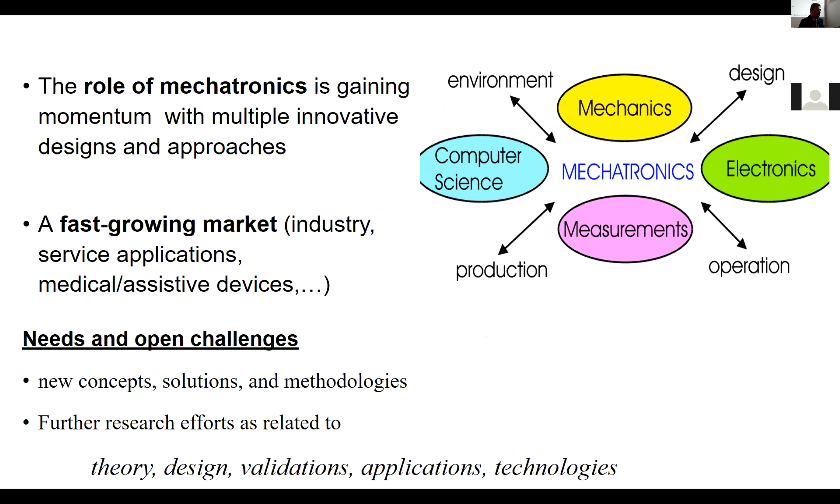This workshop is focused on mechatronics, aiming at a quite challenging, wide and multidisciplinary field. Today we will have a rich planning of presentations, scheduled with 10 minutes for each speaker, and at the end we will have a round table. This workshop is one of the activities planned within the Intelligent Mechatronic work group established within the I-RIM community.

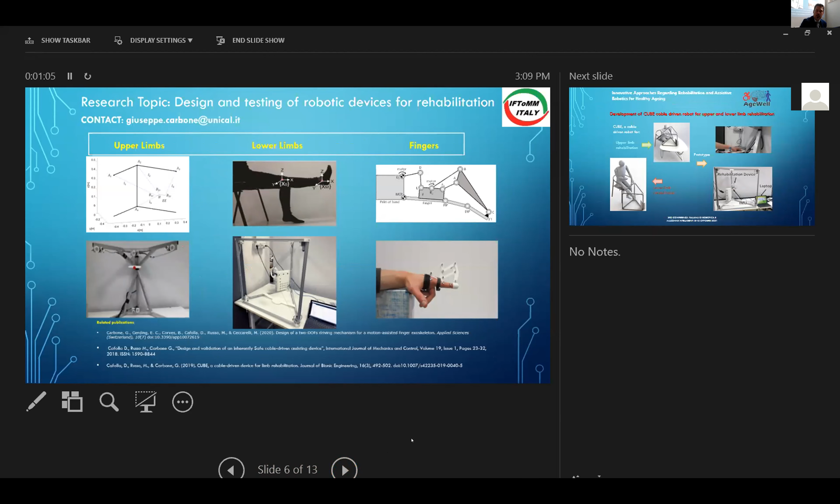Myself, Professor Gatti, and Professor Mundo are working on topics related to mechatronics. Professor Gatti is mainly focused on nonlinear stiffness and design of robotic components. Professor Mundo is focused on multi-material design, also of robotic systems. I'm focused on the design of innovative devices with a broad range of applications, in particular related with rehabilitation. Mechatronics is a very wide field with a large number of applications and a broad multidisciplinary background.

Here I'm presenting just a couple of ideas and solutions that have been developed, to drive later on the discussion in the roundtable. For instance, we have been designing Cube. We have patented this cable-driven device, which can be used for the rehabilitation of lower and upper limb at home. The idea is to have a device which can be easily portable and placed in a home desk. We have also developed a similar approach with a delta-like parallel architecture, as shown here, with the concept we named Adiutor.

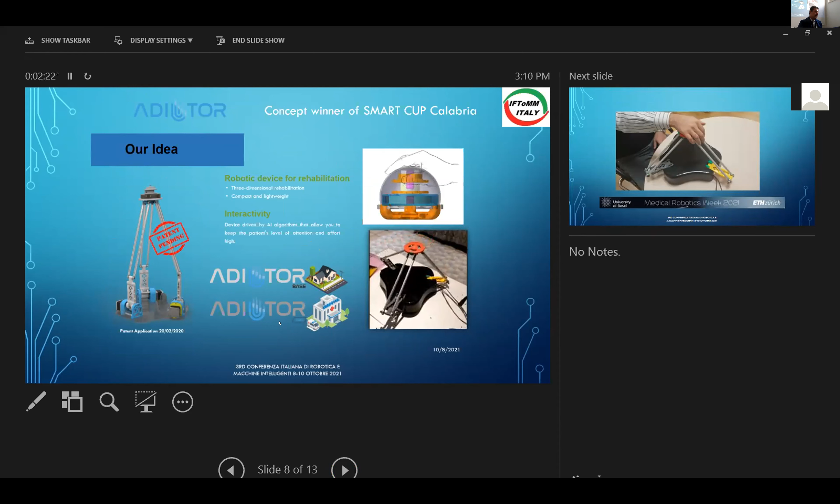For this device we have an international patent, and we also won the regional Smart Cup for establishing a spin-off company. We also won the Best Paper Award at the Medical Robotics Week this year in Basel.

Okay, this is quite user-friendly. We have been developing also a user interface and a set of sensors. This tells you how much we are in need of an integration of different expertises and knowledges, including, of course, mechanical design, but also sensors, also information technology, computer science, and so on and so forth. Also, we need medical feedback, we need to sort out ethical challenges and so on.

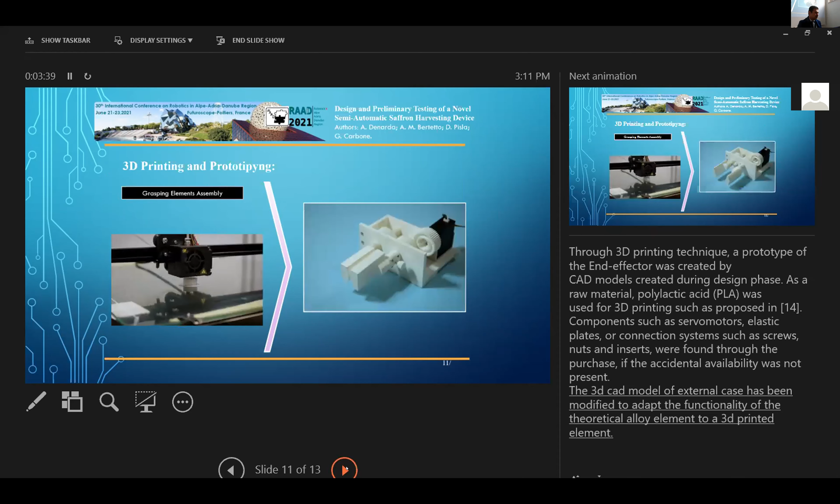Going to a completely different application, we have been also developing with a similar approach a 3D printed prototype for a horticulture application.

Some technical problems. Okay, sorry about that. Problems with the computer.

So the application was for harvesting of saffron flowers. This is commonly a handmade work, which is causing a lot of pain for the workers, who need to stay down with their back, and they can get some relief by using a kind of gripper as proposed here. Again, in this case, it's a mechatronic solution which integrates mechanics, sensors, computer science. We need to program these devices. We need also to clear regulatory rules and to get user acceptance.

So these are very common challenges which we are facing nowadays, and it's very important we are prepared to keep a broad multidisciplinary approach, which is actually the basis for the word itself. Mechatronics means combining different skills and expertises. So I feel it's very important to stimulate collaborations and working teams rather than approaching a topic from a single background.

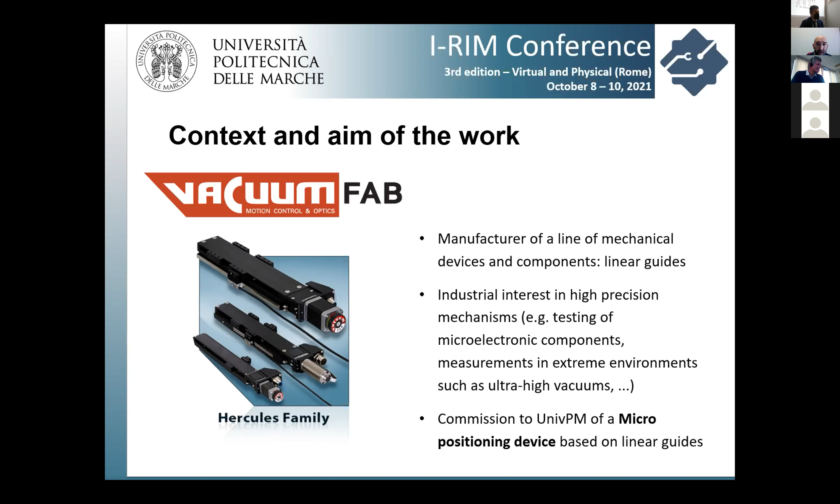And a rotation angle of plus or minus 5 degrees in the 3 directions, a repeatability in the translation of plus or minus 1 micrometer, a rotation repeatability of 2 by 10 to minus 4 degrees, and a payload of 1.5 kilograms. So starting from these design specifications, we studied many architectures, and we found the hexaglide kinematics as the best solution to go in the direction of these specifications.

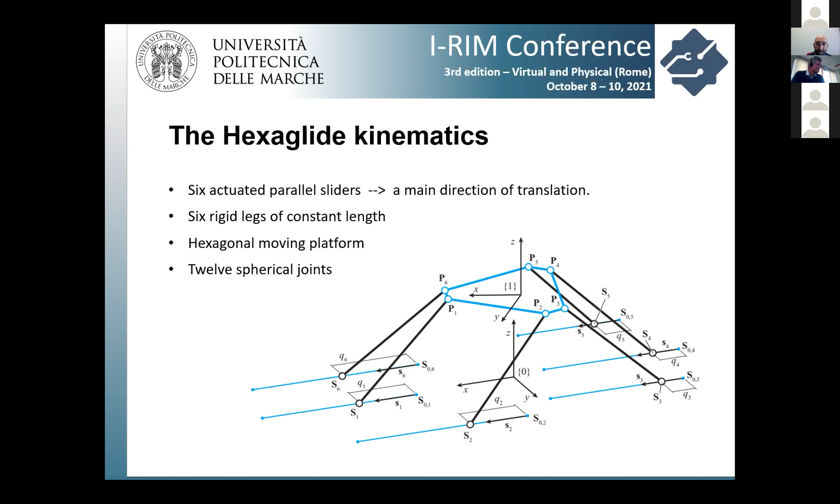And as you know, the hexaglide kinematics has 6 actuated parallel sliders. So this is the most common architecture. It has a main direction of translation that is the one given by the sliders, and 6 rigid legs of constant length. One of the parameters that has to be optimized is the length of this architecture, and a hexagonal moving platform. There are many opportunities, but this one allows an easy connection of the legs with the platform, and also has a symmetrical polar disposition of the points, and 12 spherical joints.

So the kinematics of this machine is quite common and known in the literature, and so we formalized the position kinematics as others. Using the constraint that the legs have a constant length, and starting from a parametrization based on Study's parameters and homogeneous transformation, we studied the inverse and the direct position kinematics. Just a few words about these two problems. The first one needed a selection routine to choose among the 2^6 theoretical solutions. The other one is based on Newton-Raphson algorithms to find the solution among 40 theoretical ones.

So after the first part of the study that was based on known kinematics, we decided to study the differential kinematics that is typically used to find the kinematic and static performances of manipulators. The form of the differential kinematics is the conventional one. There is a Jacobian matrix, the geometric and the analytical Jacobian matrices in this first form. And there is also a connection between the velocities at the joints, the actuation of the linear guide, the velocity.

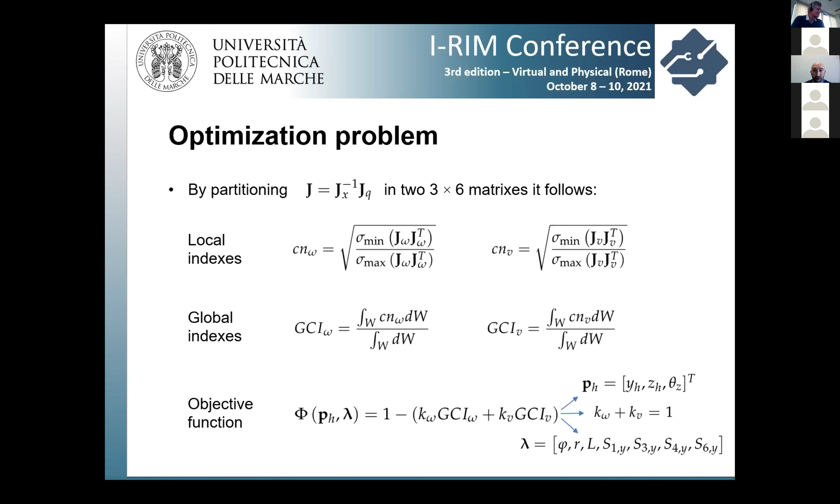And many parameters are inside this function: you can see phi and r, the two parameters that I showed you before for the platform, the radius of the platform and the position of the points on the platform. L is the dimension of the leg, and the other 4 parameters are the distances in the lateral position of the stages at the fixed base. And also p_h is the position of the platform in the home configuration. So we started our optimization with a routine based on the MATLAB optimization toolbox.

Matteo, you only have a little time to finish your presentation.

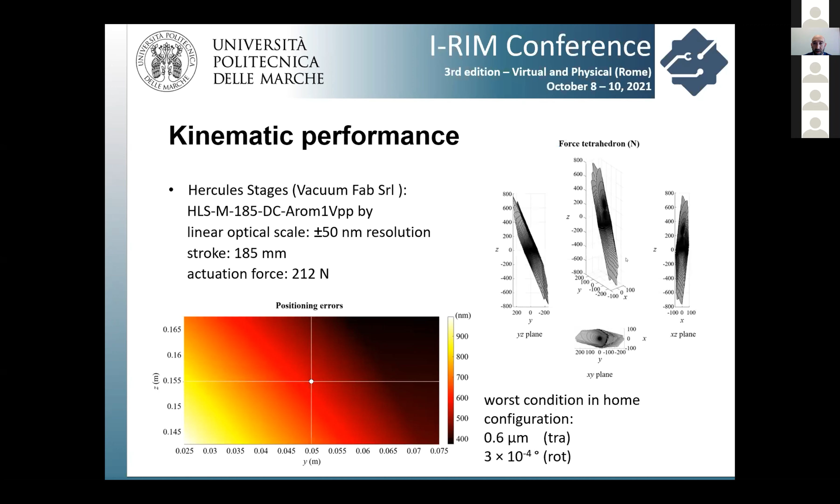And just to conclude, with this company we had the opportunity to build a prototype, and this prototype has magnetic bolts for the connections of the legs with the two platforms, and in the first tests of this machine it seems to have the performances that we found in our theoretical study. Okay, that's all.

I'm Riccardo Minto, and I'm here to present our work regarding cable robot recovery strategy, especially in case of cable failure, which we have carried out with Professor Boschetti and Professor Trevisani. So, starting with a short outline of the presentation, we will start with a short introduction to cable-driven parallel robots, focusing on cable failure and the need for recovery strategies, a short presentation of the recovery strategies that we have developed with our group, and the experimental setup that we have developed to test our recovery strategy.

So, starting with cable-driven parallel robots. Cable-driven parallel robots are parallel robots whose links are composed of cables, and so they offer several advantages. First of all, as parallel robots, they provide high payload capacity and high speeds of the end effector. But differently from rigid link parallel robots, since their links are composed of cables, it is possible to obtain a simple and cheap design and also carry out large workspace manipulation tasks.

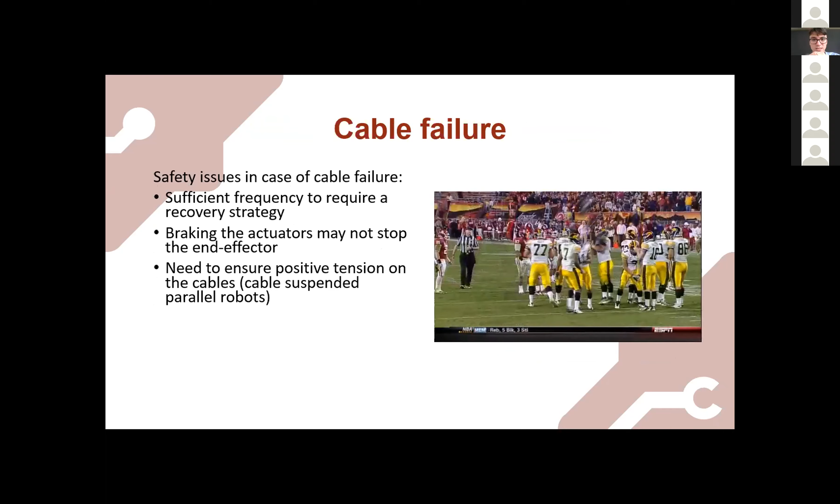However, there are some safety issues when working with cable robots, mainly cable failure. Indeed, as you can see in this video, a cable breaks and the skycam, in this case, falls down on one of the players, and indeed cable failures have a significant frequency of accidents. For example, in 2013 and 2016, there were also some injuries due to skycams falling, and so there is a need for recovery strategies. And it is not as simple as with rigid manipulators, where it is possible to brake the actuators to stop the end effector, since it could lead to other cable failures, worsening the problem.

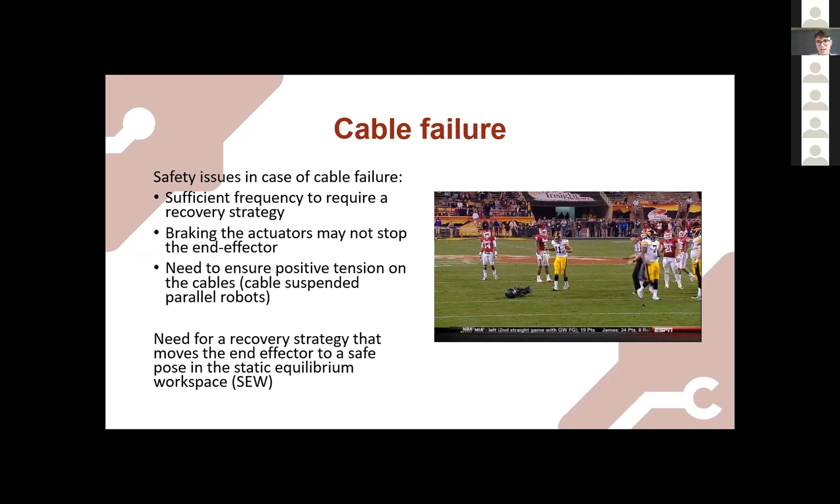And also there is a need to ensure positive cable tension, especially when working with cable suspended parallel robots, where the positive tension in the static workspace is carried out by gravity. And so we need a recovery strategy that moves and stops the end effector in a safe pose in the static equilibrium workspace.

When our group started this work, the literature was mainly focused on the analysis of cable robot failure modes. So, for example, not only cable failure is the most important one, but we also have, for example, cable break, cable compression, or wire jamming.

The first solutions that were proposed for cable failure were, for example, adding auxiliary cables, but this adds complexity to the system. Other solutions based on adding a compensation tension on the remaining cables were proposed, but it is possible only for overconstrained applications where the cable breakage does not change the static equilibrium workspace of the cable robot. And so it is possible to add additive tension and stop the end effector.

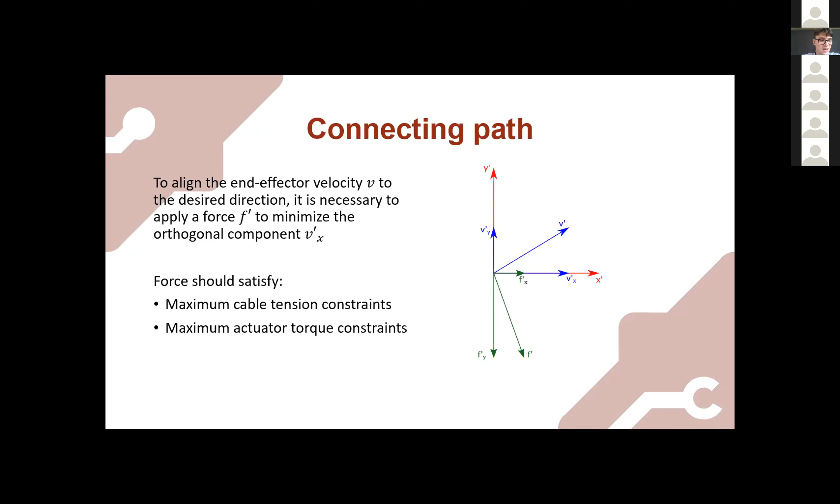To change the velocity direction, we need to apply a force that minimizes the components of the velocity which are orthogonal to the desired direction. This force should also satisfy constraints on the maximum cable tension and on the maximum actuator torque, because the actuators should apply the required force.

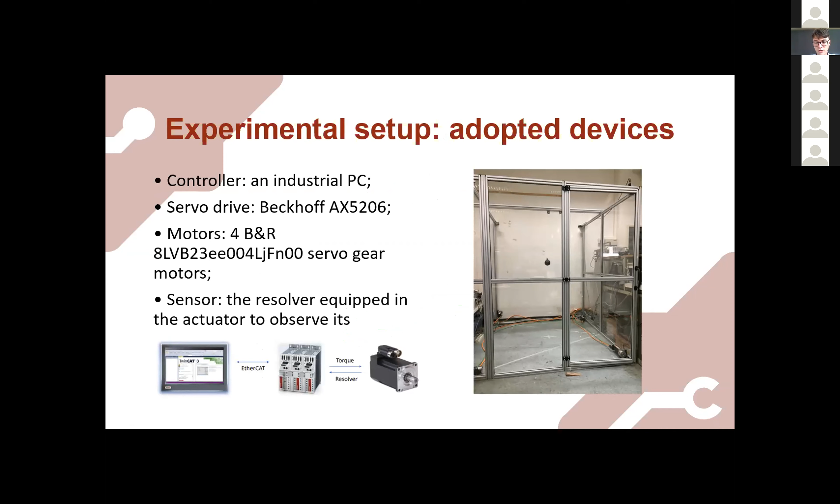The recovery strategy was also tested on experimental devices which we constructed in our automation robotics laboratory, with an industrial PC and 4 B&R servo gear motors controlled by two Beckhoff servo drives. To control the actuators, we adopted a hybrid control based on an inverse kinematics PID and an inverse dynamics feed-forward.

The PID was needed to control the trajectory of the end effector not only during the recovery trajectory, but also during normal operation. However, we also needed to ensure that the cable tension was positive. We do not want compression on the cables. Therefore, we introduced the feed-forward.

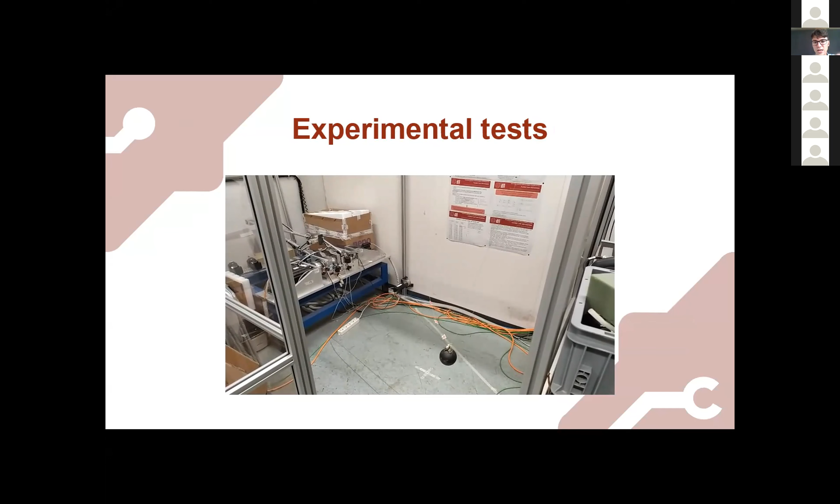In conclusion, we have considered cable failure for cable suspended parallel robots, which was not considered much in the literature when we started this work some years ago. A two-phase recovery strategy was defined and tested in simulation, and then also tested in an experimental application, and it is still being experimentally tested.

So lastly, I'm going to share some references to our work regarding our study on recovery strategy.

Okay, can you hear me? Yes, I can hear you. Okay, I think there were some problems. Okay, and so I was... I think that Chiara Cosenza has her microphone open. Okay. So please, thank you.

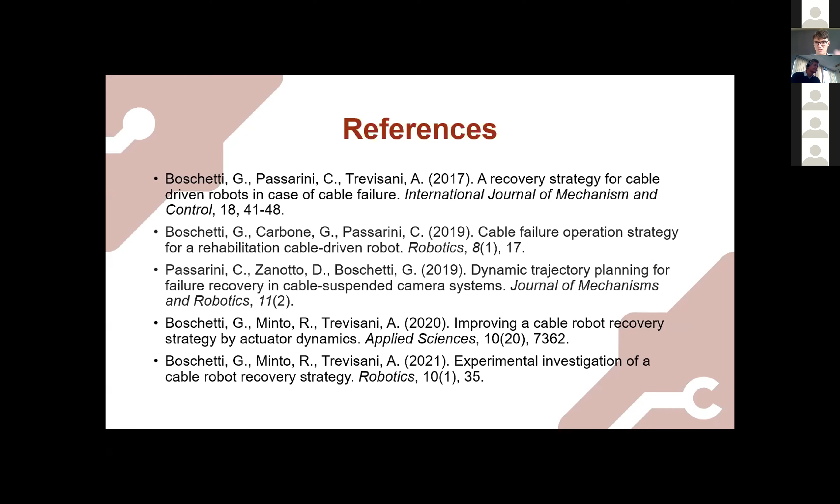Thank you. And so these are some references for our work over the years, and thank you for your attention.

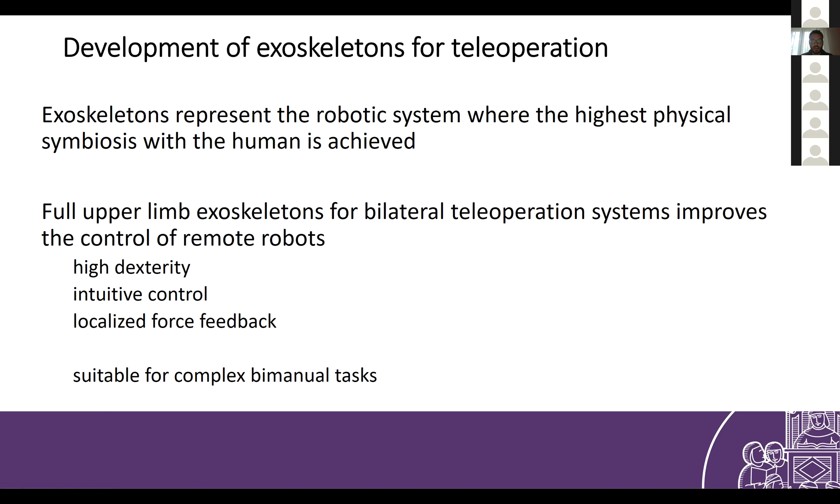Why? Because they can assure high dexterity and an intuitive control, because I can control the slave robot directly moving my hands, my arms, my torso, so my body. I have a localized force feedback directly in my limbs. So all these advantages make the exoskeleton really suitable for complex bimanual tasks. So they are the best solution when I want to perform complex tasks during teleoperation.

And for a robotic challenge that is going on, the Avatar X Prize, we developed, also as the result of several researches in this field that we carried out during the years with other projects, this system for telepresence. It is made by a master, so a control station, and the slave robotic avatar.

In the control station we have, as I was saying, two arm and hand exoskeletons to control the movement of the robotic arms of the slave and also the grippers, which are actually dexterous robotic hands, pedals for navigation, and a head-mounted display to have stereo camera streaming, so stereo visualization of the remote environment, and stereo headphones and microphones to also interact with the remote environment by audio.

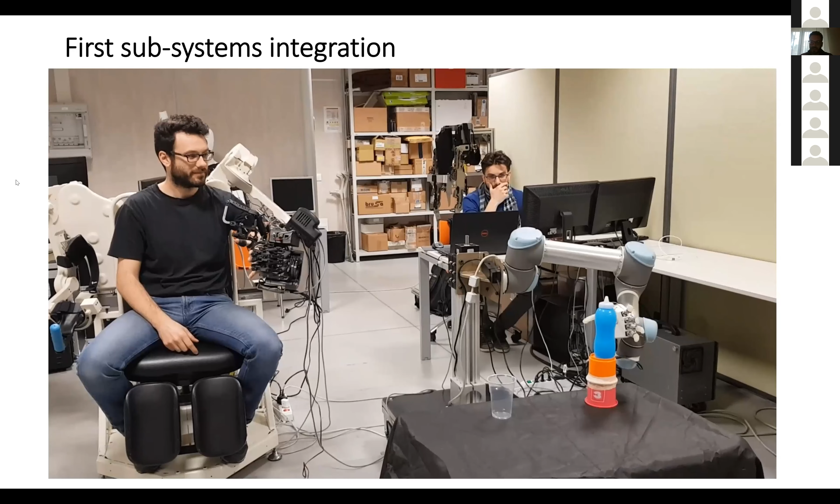Sorry. And so this is just an archive repertory video. It was just the first test of the final slave robotic arm. It was just a focus on a picture of the roadmap for developing the system. So we started with really simple scenarios that were not remote, of course. We were just testing the control, and then we arrived at a final system.

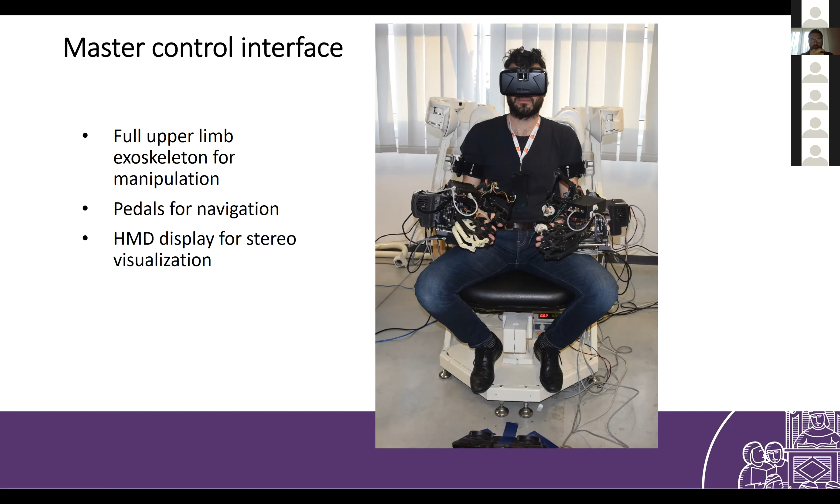So this is actually a picture of me in the control station with the full devices. As you can see, I'm wearing the arm exoskeleton and hands. The hands are underactuated, so they have all the degrees of freedom of my hands, so no restriction to my movement. And now I have the pedals. Now I'm not using them with the feet, but in front of me there are the 2 pedals for the navigation, and the HMD display for the visualization.

While this one is the mobile platform that we use as a slave robot. The platform has mecanum wheels, so omnidirectional wheels, and depth cameras for navigation assistance. So it is not autonomous, but it is assisted navigation, just for safety. The stereo camera for the video feedback, anthropomorphic hands, and redundant arms with 7 joints like human arms.

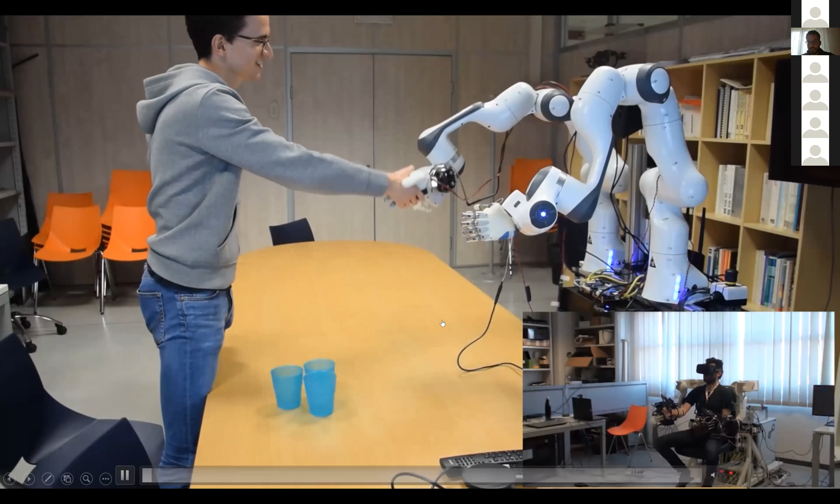This is a demonstration video for the capabilities of the system. In the small box, there's the remote environment, with the operator in the exoskeleton controlling the arm in a scenario involving natural communication and interaction with another human in the other environment.

You can see the device is able to grasp objects and receive feedback, so it can physically interact with the environment. Now he just cheers the glass, but he can also perform precise tasks.

On the left you can see the two images, left and right, that the operator receives to have the stereoscopy, such that he can perceive the depth in the environment and perform physical tasks like pointing at something. Since time is finished, I'll skip ahead.

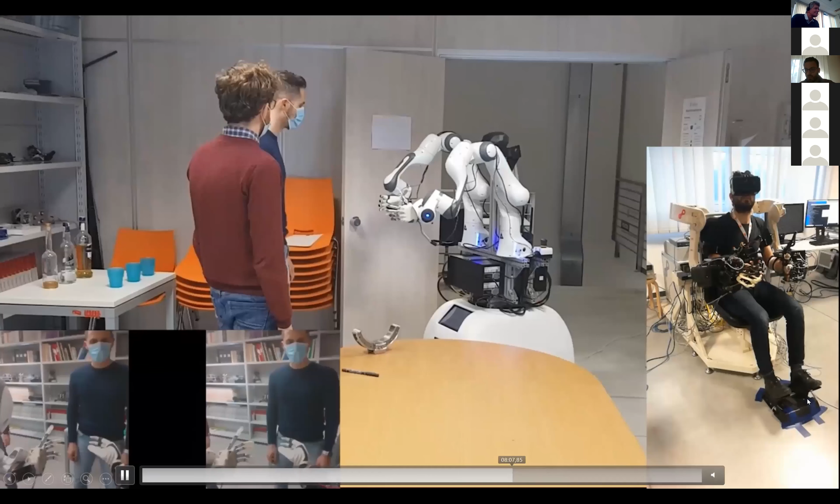This is the navigation capability. With 2 pedals, I can control all 3 degrees of freedom independently for the platform with mecanum wheels on the floor. So there's not only dexterity for the arm and hands, but also dexterity for movement.

Here Massimiliano is told he has a short time to conclude. Yes, this is the last video, last scene, so I'll just skip to when there is some physical interaction.

This is a close-up of the system with the arm and hand exoskeleton. All the design is made in our lab, and that's it. Let me shut down the video and presentation. Many thanks for your attention, and if you have any questions, I'm here.

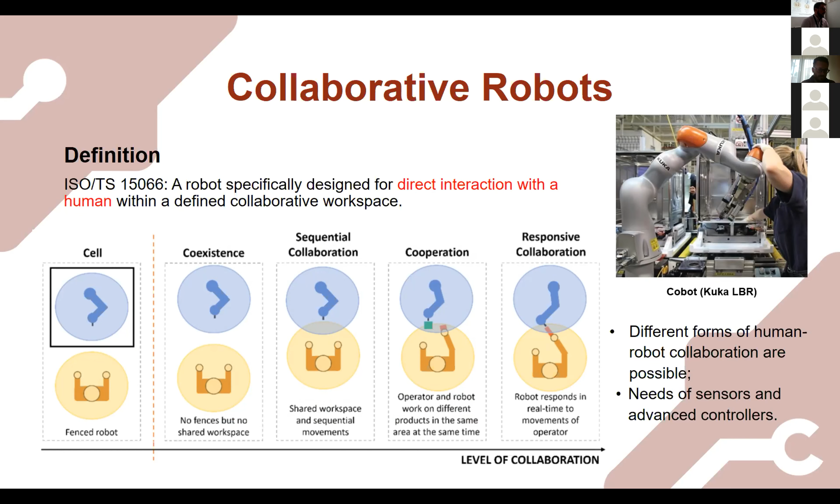There can be different forms of human-robot collaboration. They can coexist, staying in the same place but with different workspaces, or they can have sequential collaboration, sharing the workspace and doing tasks in sequence, or cooperating to assemble something together. But the most complicated and complete is responsive collaboration.

In this kind of collaboration, the robot and human, several issues must be addressed in order to have a responsive and safe collaboration between these two actors. For instance, a mechanical interface must be designed properly for the cooperative work.

The robot must have an advanced control in order to respond to feedback from the human. Sensor placement must be designed carefully, because in order to monitor the safety of the interaction, sensors can be placed on the workspace, on the robot, or on the humans.

There can also be different kinds of events that can be dangerous for the human or the robot, like an unwanted collision that could injure the operator. Another point is the ergonomics of the operator's posture while working with the robot.

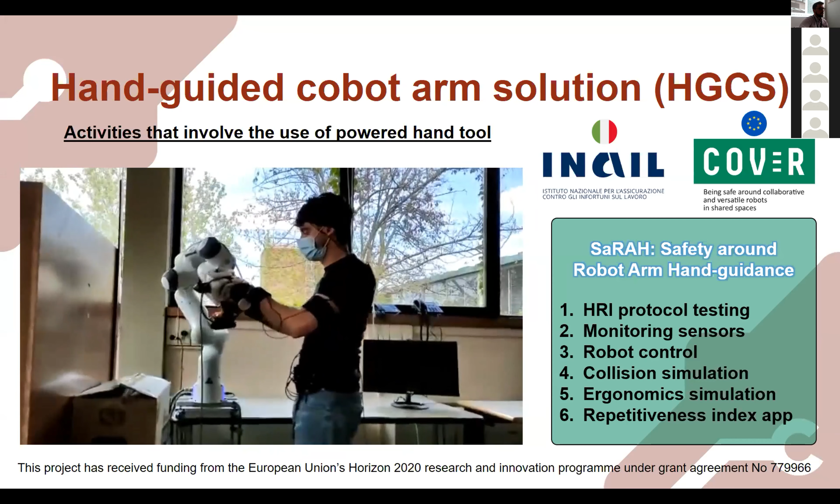We have also worked on the effects of collision that the robot can have on the human body, so we set up a framework where we could simulate the impact between the robot and the human. We have also done the simulation of the ergonomics of the human while working with the robot, and finally we have implemented an app to compute the repetitiveness index while the worker is working with the robot, in order to calculate if it's doing a heavy load that needs a break or not.

For doing this, we have hardware equipment in our lab composed of a 7 degree of freedom hand-guided cobot arm from Franka Emika that is very precise and has a payload up to 3 kilos. We also equipped the end effector of this robot with a 6-axis force torque sensor from Schunk that has a very wide measurement range with compact design and high resolution.

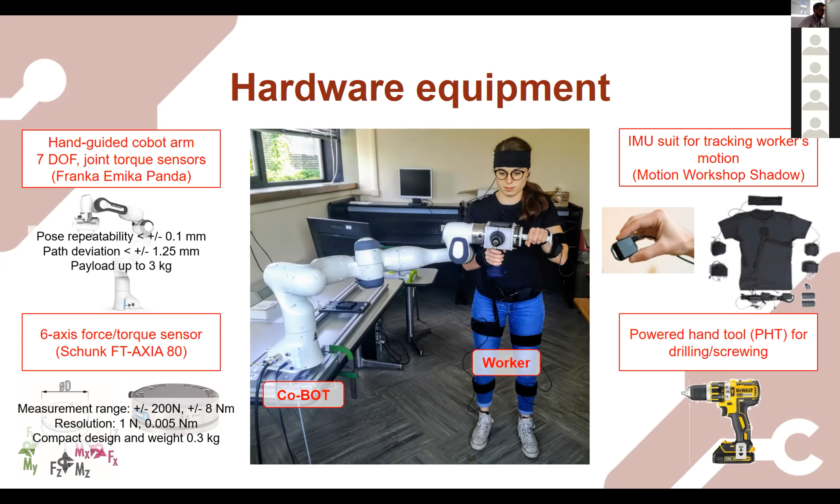As a monitoring sensor, we are using an IMU suit in order to track and reconstruct the body motion of the worker. This kind of suit is composed of 17 IMU units. An IMU is a unit composed mainly of 3 sensors: the accelerometer, the gyroscope, and the magnetometer. And then we use a drilling tool in order to simulate the working condition.

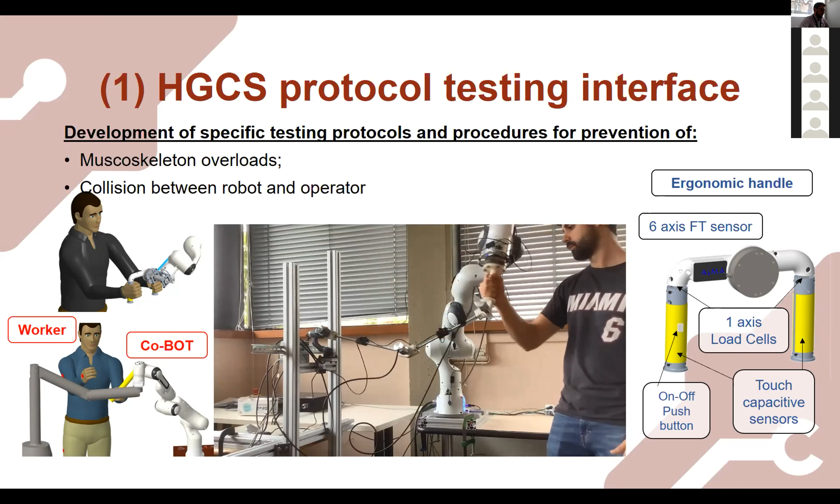All these points we have elaborated in parallel within our group. So we developed testing protocols and a test bench in order to measure and understand which kind of mechanical interface is needed to have a proper collaboration between the human and the robot.

Then we implemented a calibration procedure in order to understand the posture of the worker while he's working with the robot. For doing this kind of monitoring, we needed this calibration because the IMU sensor can be affected by electromagnetic interference.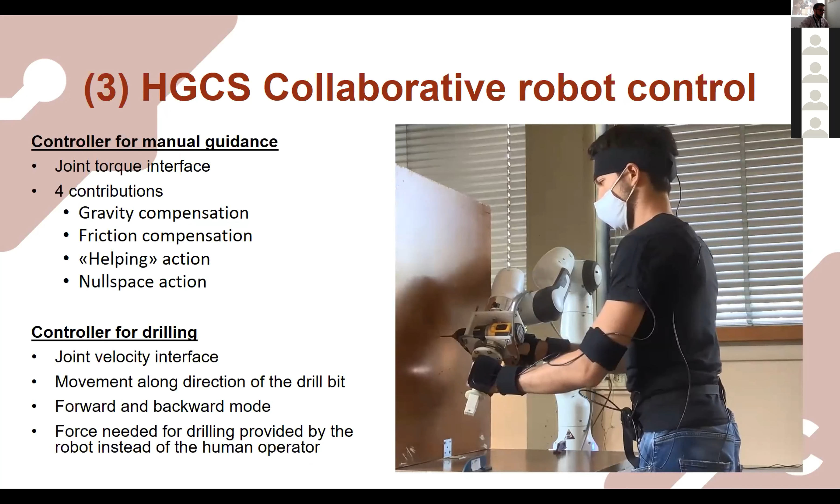We have also worked on the collaborative robot control, computing 4 different kinds of controllers for gravity compensation, friction compensation, and the control of the robot in order to assist the worker while doing the task, such as drilling a hole.

With all this hardware, we've implemented the system integration, in order to implement communication between the sensors and the robot, to assure always a safe interaction and a safe disposition of the robot with respect to the human.

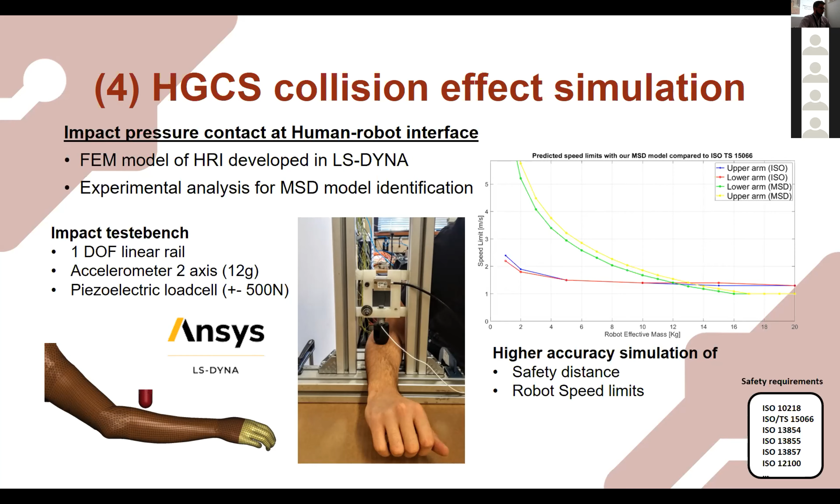We have also done a set of activities to study and simulate the effects of a bad collaboration between the robot and the human. We performed a simulation analysis on ANSYS LS-DYNA for the implementation of the impact effect of the robot on a person's arm, and we studied the protocols and safety requirements in order to understand how far the robot can go without hurting the worker.

We also studied, still in a simulation framework, the ergonomics of the worker while doing the task with the robot. We used an AnyBody system to understand, with multiple sensors, the effort of the worker's muscles. Finally, we developed the SaRAH app, which can be used by production plants that employ human-robot collaboration, in order to understand if the human is in a bad ergonomic position while using the robot.

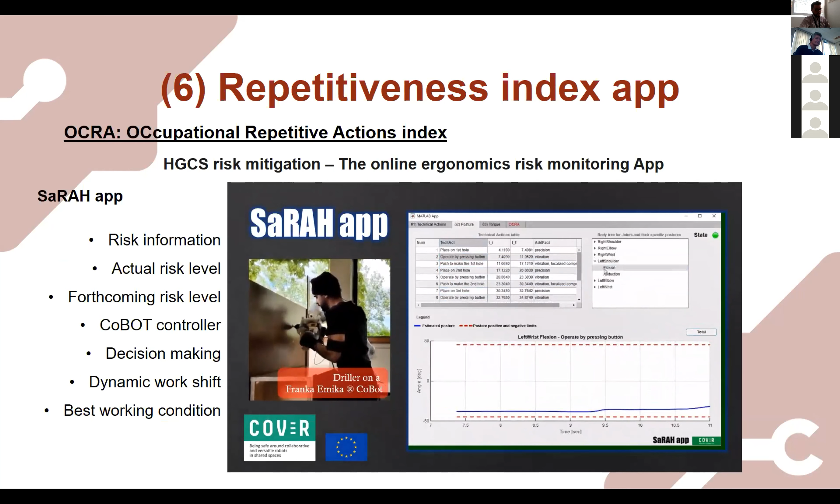So in the end, we addressed all the tasks and issues that human-robot interaction can imply when we have direct interaction between the human and the robot for a common task. We are still trying to understand how to take this technology out of the laboratory and implement it in real industrial plants.

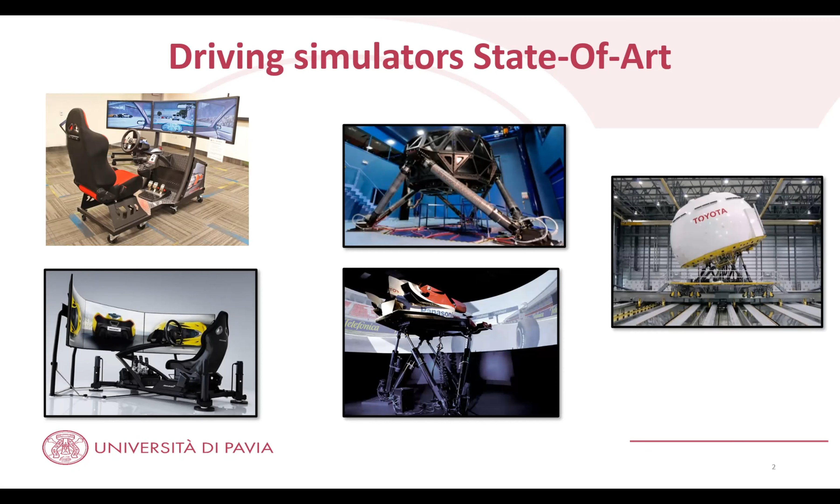Driving simulators can be used in different fields, from entertainment to research and advanced training. A first classification can be based on the quality of the simulation produced: low-level simulators usually have a fixed car seat and a fixed screen; mid-level simulators consist of a car accelerating in 1 degree of freedom; high-level simulators are usually characterized by at least 6 degrees of freedom. Why at least will be explained later.

Specifically, a driving simulator is a particular mechatronic solution that has the aim to replicate the vehicle dynamics and the induced feeling on the driver. In this video, it's possible to see an example of the vehicle dynamics transformed into the robot dynamics for that purpose.

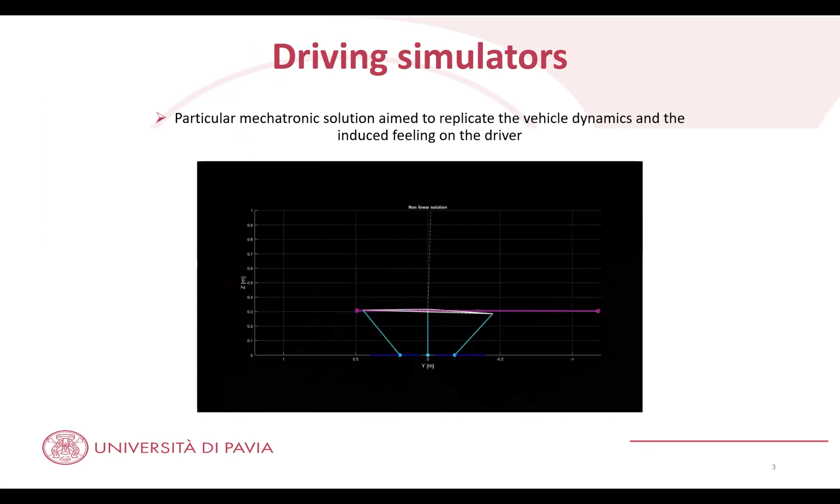Nowadays, driving simulation is used for different purposes and applications. From the driver side, we have analysis of driver behavior, analysis of driver response, the effect of noise and vibration on the driver, and also training in critical conditions. We can also find development and testing of tools like the human machine interface, testing of ADAS systems, and control system design, such as system in the loop and hardware in the loop. Finally, they can be used for tire and car development.

At this point, it is clear that a driving simulator is a useful mechatronic system, not only for entertainment, but also for research and development. Given this overview of the driving simulation field, here are the main components of a driving simulator.

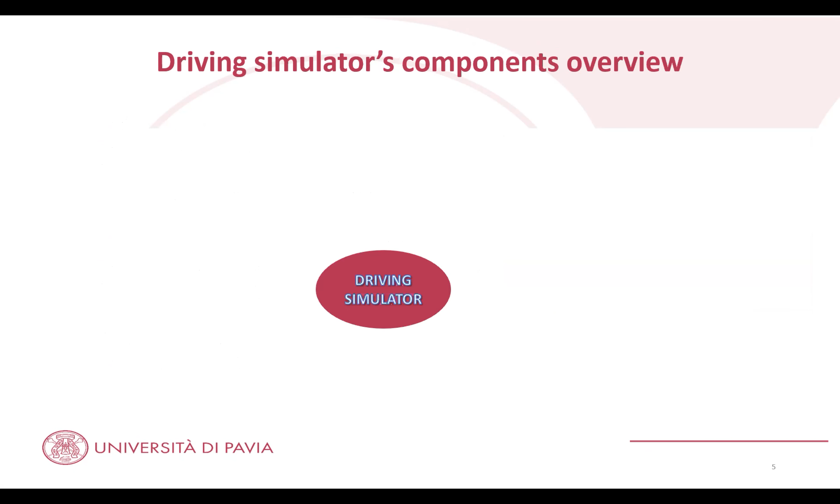Firstly, as driving simulation aims to reproduce the dynamic behavior of a vehicle and the feeling on the driver, the main component is the motion system. The history of dynamic simulators and studies conducted over the years led to the knowledge that a high-quality simulator needs 6 degrees of freedom. It is true that the main part of a simulator's motion is the motion system, but it's clear that if a particular motion is not linked to a correct view, the final sensation on the driver will not be realistic.

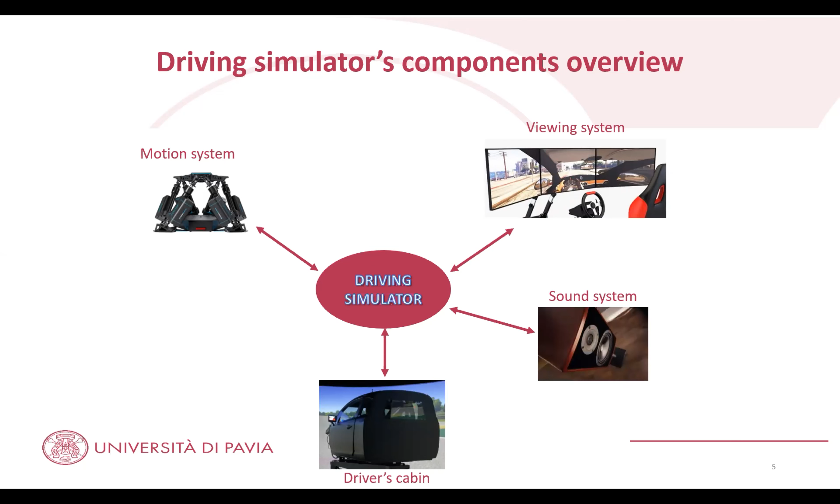Another important component is the driver's cabin, important for the driver's immersion in a high-defined environment. As for the viewing system, the sound system also plays an important role for the final accuracy of the simulation and the driver's feeling. And we cannot forget about auxiliary systems like pedals, steering wheels, and seatbelts.

The final ingredient of a driving simulator is a real-time computer where all these components are taken into account. In this real-time computer, we can manage the sound and the view of the pilot at the same time, along with the direct and inverse dynamic and kinematic analysis of the robot.

So this is the typical setup of a high-level simulator, and this kind of simulator usually has some problems like the noise, the vertical encumbrance, the footprint, and the difficulty in having large movement and therefore maintaining acceleration for a long time. So due to these drawbacks, innovative solutions are required. And here comes into play the new family of driving simulator that I'm here to introduce.

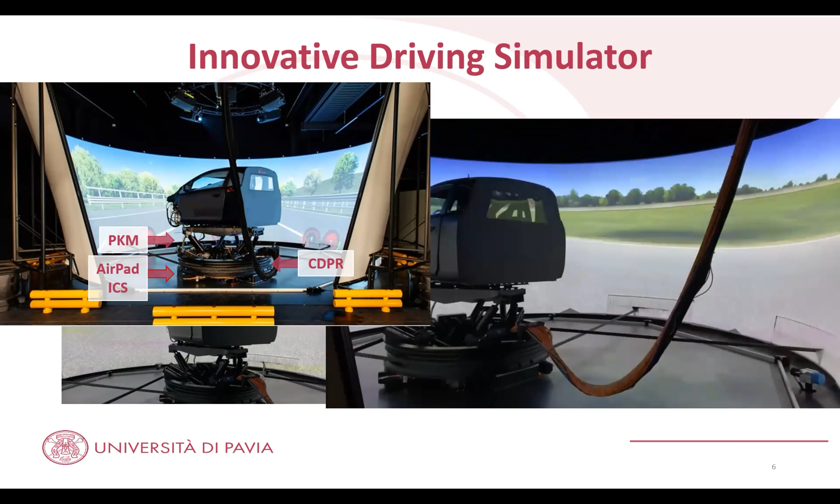Specifically, we can see here the parallel kinematic manipulator as the upper stage. The lower stage is a cable-driven parallel robot. It is worth mentioning also the air-pad suspension system at the lower stage and also the inertial compensation system. Let's see then this particular solution. As I said, the motion system of this simulator is based on this structure that we can see on the left of this slide. We have the 6 degrees of freedom parallel kinematic manipulator, the inertial compensation system, and the lower stage is a unique solution, a cable-driven parallel robot with 3 degrees of freedom. Usually for the lower stage, a Cartesian rail is used.

Going in depth, the upper stage is responsible for the high frequency dynamics. Instead, the lower stage, the cable-driven parallel robot, is responsible for the lower frequency dynamics. This solution of two platforms linked together with 3 redundant degrees of freedom offers the possibility to extend the simulator frequency range, and it gives the possibility to change the yaw axis. The solution involved at the lower stage, as I said before, is unique, and it gives the possibility for a large workspace and to realize a sharp and compact system. It also offers the possibility to avoid shortcomings of traditional machines, like the Cartesian rails and slides that are noisy.

Other 2 important characteristics of the motion system that I introduced before are the air-pad lower suspension system and the inertial compensation system. The air-pad solution, the one that we can see here, allows the simulator to move on the base plane, minimizing the friction and deleting phenomena like stick-slip. However, the runner block can provide a binding reaction force only upwards. In order to prevent the detachment of the pad from the sliding surface, it is necessary to provide a force that counteracts this, and this is performed with this electromagnet.

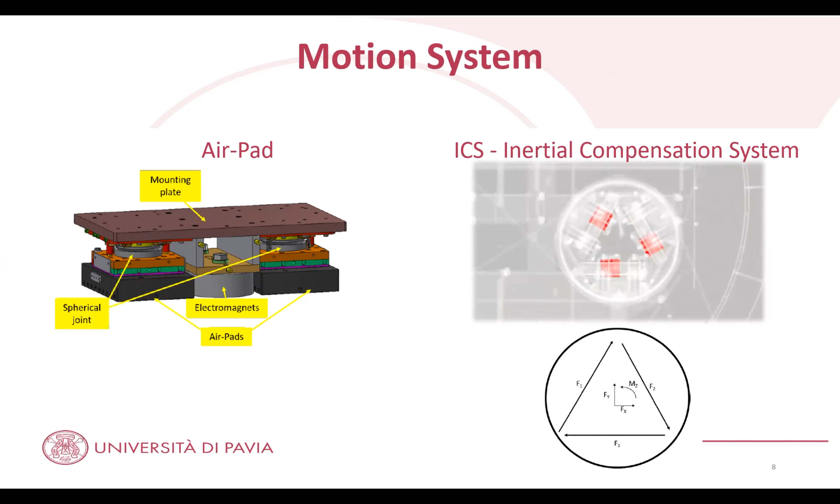But not only components are important for this complex system, also the design phase, and I'm referring specifically to the sizing process. The sizing process is based on the definition of forces and torques on the structure and on the actuation system by a given platform trajectory. But for a complex system like the one we are speaking about, it's complex to define a predefined task to use for the sizing process, because since we are speaking about driving simulation, it depends on a lot of factors like the track, the driver, the car that we are using in the simulation, and also the weather. So it is clear that it depends on a lot of factors.

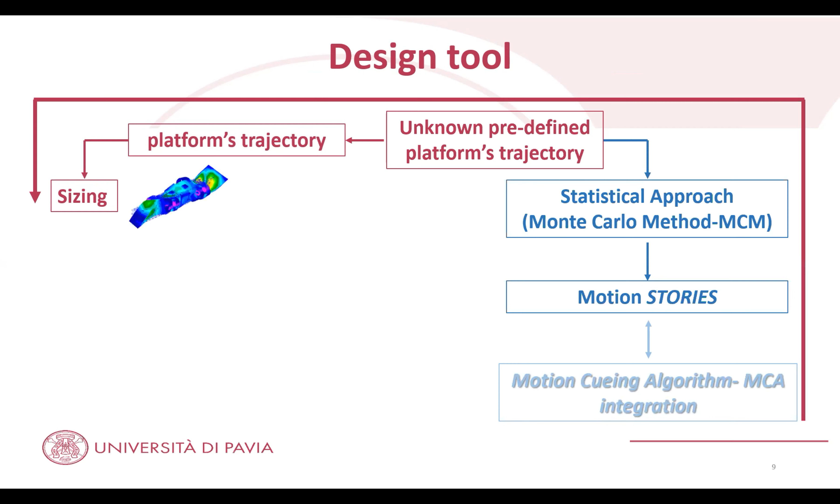And here comes into play a statistical approach like the Monte Carlo method, from which a number of stories are generated. With the integration of the motion cueing algorithm, which is responsible for the transformation of the vehicle dynamics into the platform dynamics, the most demanding task is extracted, and the sizing process can be resumed. At this point, if it's necessary, an optimization step can occur.

So as I said at the beginning, a fundamental role is played by the real-time system, and the main goal of this system is to not introduce delay in the control and the management of the simulator. And this real-time system is responsible for the communication between the different worlds that interact in this mechatronic application, and it is implemented via fieldbus.

And with real-time, I refer also to the real-time controller that allows the simulator to be controlled. Here, the dynamics and the kinematic analysis are performed in real time in order to have all the information required for the control. And of course, as I said before, the vehicle dynamics has to be linked to the correct view and the correct sound for having the most realistic simulation.

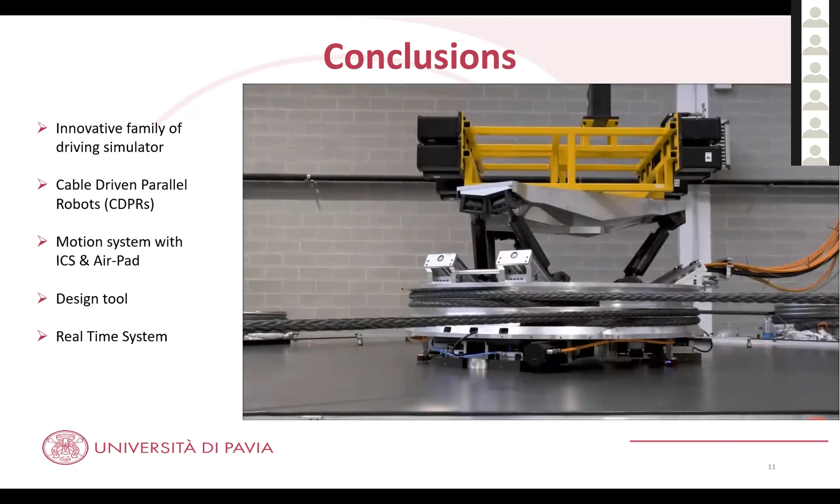At this point, I've reached the end of my presentation. On the right, it is possible to see some steps of the overall project. Briefly, I summarize what I introduced in this presentation. We saw an innovative family of driving simulators based on the cable-driven parallel robot at the lower stage, with the motion system, with the inertia compensation system and the air-pad lower suspension. We saw also a specific design tool for the sizing process, and we saw the necessity of a real-time system for this complex mechatronic solution.

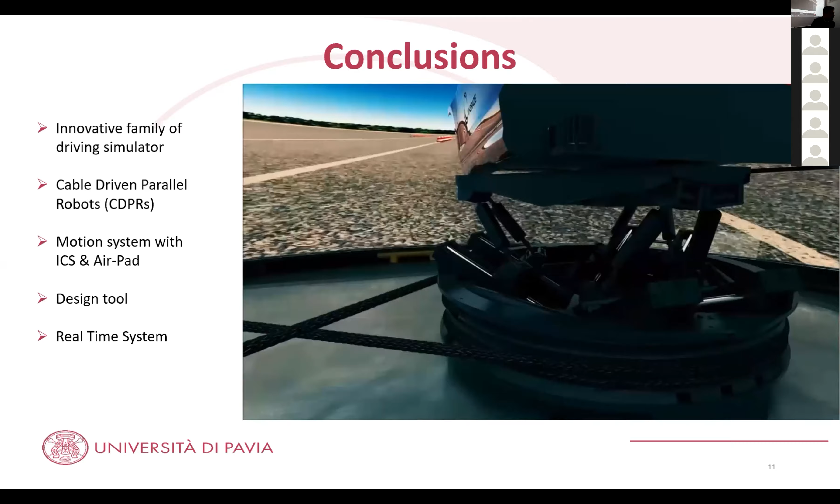Can you hear me? Yes. I will share my screen. You see just a light blue screen. Yeah, the camera is not working. We see something coming on. All right, we see your screen and we hear you.

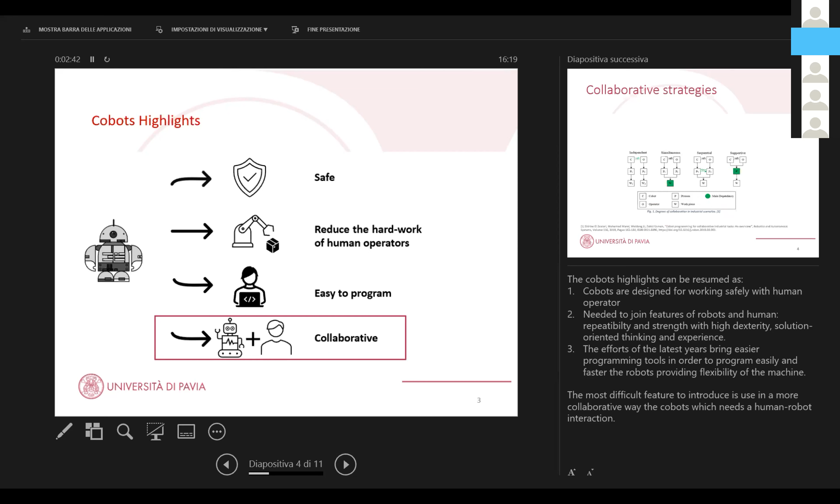So we need two ingredients for this. Mainly, we need a good design and a good collaborative strategy of the robotic task. And we need a way to communicate with the robot. So we need technology able to interact. The different kinds of collaborative strategies that can be adopted with collaborative robots are mainly four and known in literature, like the independent one, where we have the cobots that can work safely with the operator, but the operator and the robot are doing different tasks and working on different work pieces.

We have the simultaneous one. We have an improvement in this case, where the operator and the robot are working always with different processes, but now they are working with the same work pieces. The sequential collaborative strategy has as main dependency the time. So the cobot and the operator are working always on different processes, but the processes are synchronized in this case, and they are working on the same work piece. But we want to use the supportive collaborative strategy, because we would like that the cobot and the operator are working together in the same workplace, on the same workpiece, on the same workspace, and working together for reaching the same process.

So in order to do that in industry, we need that sometimes the robots are doing the most repetitive task and the supportive collaborative strategy. So we reached a hybrid compromise between the two collaborative strategies, and we arrived at the collaboration on demand.

This collaboration on demand is a mixture between the collaboration strategies: independent, where the operator and the robot are doing different processes, and after an interaction, that in our case we have reached using the brain-computer interface, we can interact with the robot and pass to the real collaboration, so the supportive collaborative strategy.

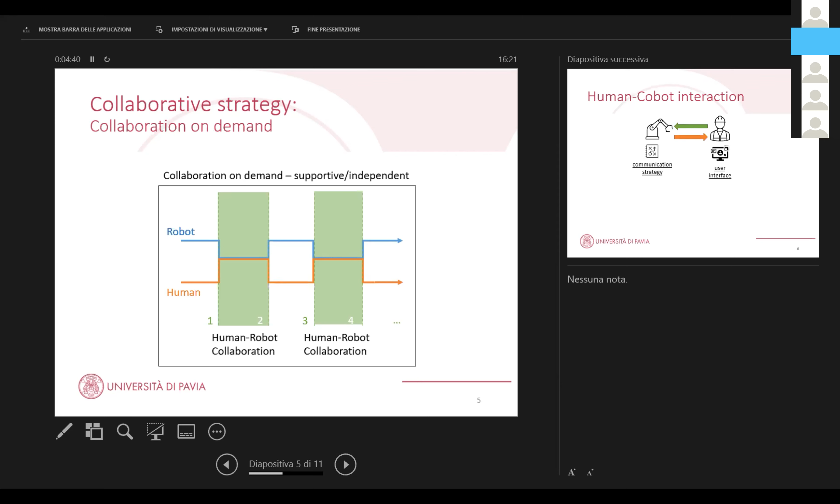In order to interact, we can study the different kinds of interaction. The interaction needs two components: the communication strategy, so the kind of messages that we need to share between the human and the robot, and the user interface, so the kind of technology that the operator should use in order to communicate with the robot. We are using them every day.

For example, the first one is the teaching pendant controller that provides a joystick and a graphical interface for the operator. But we have also gesture recognition and voice recognition, so we are using voice and gesture in order to control the robot. We have also haptic control in order to guide the robot. But we are focusing on the brain-computer interface, where the human can use their own brain to send commands towards the robot, without using hands or voice.

In particular, we have used the SSVEP technique. Using the visual stimuli, we can excite the visual cortex area, get signals from the brain and send the command towards the robot. This kind of signal can be interpreted as a frequency recognition system. So the framework in which this kind of system is working can work in this way.

So we have the human operator, who is using, for example, a brain-computer interface with a helmet with electrodes, and we have also the acquisition system of the data. Using this SSVEP technique with visual stimuli, we can process these EEG signals and send command messages. These command messages should be mapped in the task of the robot. So after having chosen the right collaborative strategies, we interact with the robot.

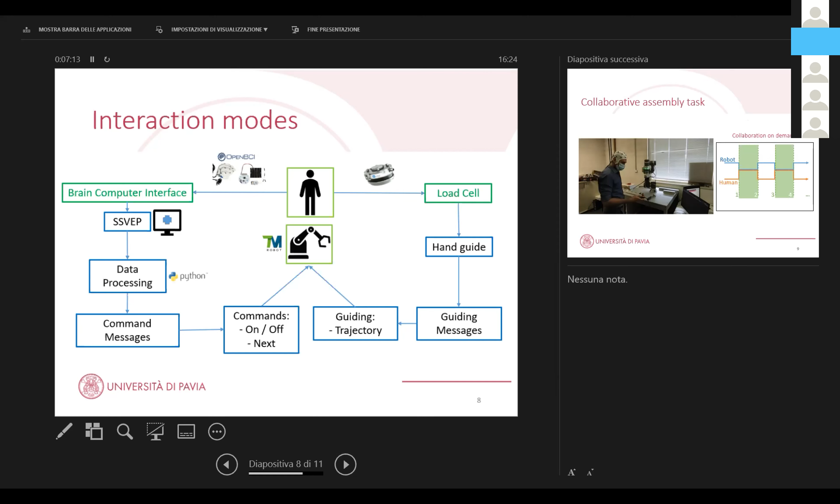In our assembly task, we have used a load cell, a force sensor, in order to integrate a hand guiding control as a sort of haptic interface. This kind of control is able to send a guiding message to the robot, sending the trajectory to the robot, and the operator is able to use the hand to guide the robot. With this technique, the force control is able to sustain high weight, and so the operator should not take into account the weight of the pieces being mounted.

In this video, I would like to show how we have used the brain-computer interface for switching the different kinds of collaborative strategy. Here we are in an independent case. The operator now is looking at the monitor, and through BCI, we can send commands to the robot to enable the haptic control. Now, with the brain-computer interface, the operator was able to stop the haptic control, and the robot was able to fix the position of the bar.

When the operator needs, they can unlock this mode, look at the flickering screen, and return to the independent collaborative strategy. The operator is still able to mount and do their process, and the robot itself is able to do its own task. Now we are returning to the collaborative mode, the supportive collaborative strategy, and we are still switching using the BCI.

I would like to conclude that with this kind of collaborative strategy, the collaboration on demand, the robot was able to assist the operator effectively, in an easier and simpler way, without previous knowledge of how to program a robot. We have exploited the brain-computer device in order to drive the robotic task using the SSVEP frequency recognition. I would like to remark that for the SSVEP technique, only 2 sensors are used, the 2 electrodes on the visual cortex area. So we don't need a very complex system to integrate this kind of interface.

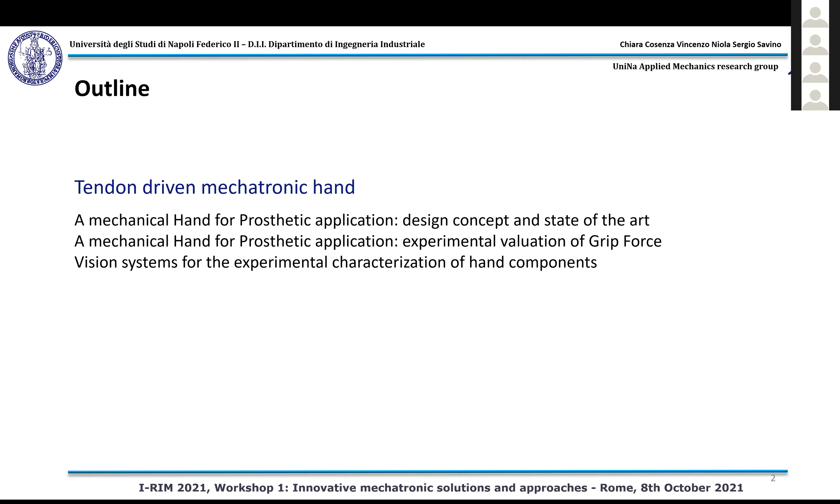Design concept of our hand: as you can see, the hand presents a differential mechanism composed by pulleys. Thanks to this differential mechanism, the force can be distributed among the different fingers composing this hand. This is a 5-finger hand, and every finger is composed by 3 phalanges, the distal, the middle, and the proximal phalanges. The hand tries to imitate the human hand.

This is a tendon-activated system in which we have 2 tendons, a traction and an antagonist tendon, that are able to allow the finger closing and reopening. In the current prototype that we are using, the whole movement of the hand is activated by just 1 motor. So this is a strongly underactuated mechanism.

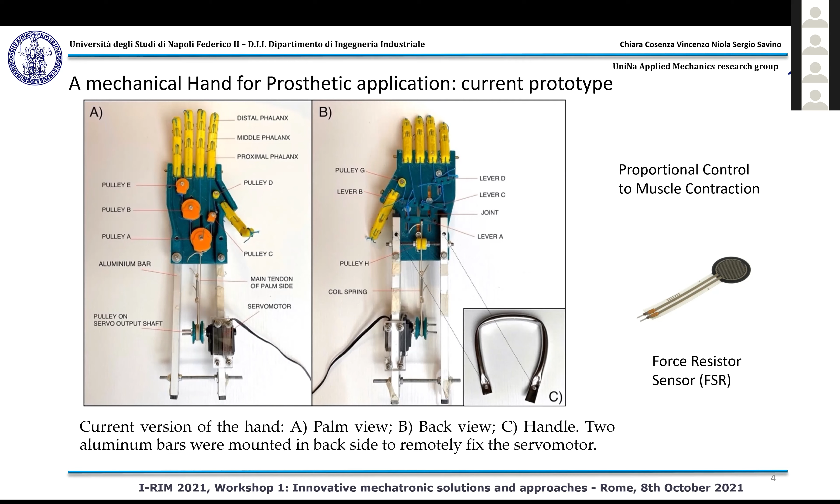As an alternative to an electromyography sensor, we are using a force resistance sensor that, thanks to a proportional control to the muscle contraction, can guide the hand to open and close proportionally to the muscle contraction. In the research activities about this hand, before prototyping we used multi-body models that are able to study the kinematics and the dynamics of the hand in silico.

One of the most important features of this hand is that it is a low-cost prototype. The whole prototype device costs less than $100. We are currently improving this hand to develop a thumb with anthropomorphic features like the human thumb. We are redesigning the force distribution and the palm design, thanks to multi-body simulation modeling. And we are currently testing new sensors like conductive rubber of different shapes for control.

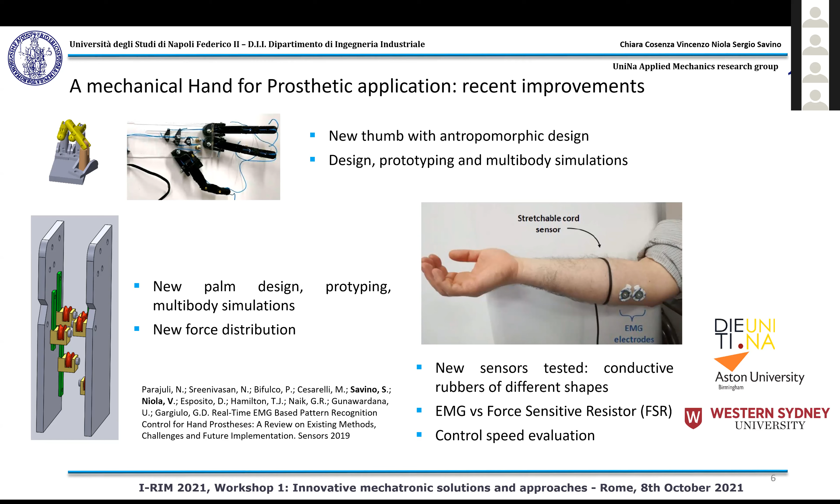Another experimental application for the characterization of finger kinematics with a quantitative approach is the employment of vision system devices to experimentally measure the finger kinematics. This can be a good choice for the experimental characterization of these low-mass components, because we don't have to use further sensors on the systems under study.

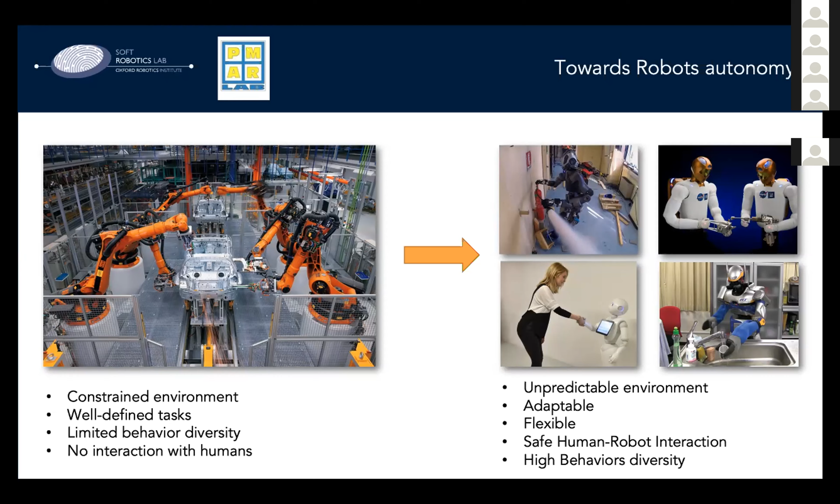So this is the reason why my research in particular is devoted to soft robotics, and soft robotics is the field that aims to equip robots with new capabilities that are based not just on the control system, but also on material properties, mechanical intelligence and the morphology of their body.

So, of course, soft robotics is a new field that requires coping with new technological challenges, in particular in terms of fabrication, sensing, actuation, but also from the point of view of designing intelligent mechanical systems that show passive behaviors that can be exploited in an intelligent manner.

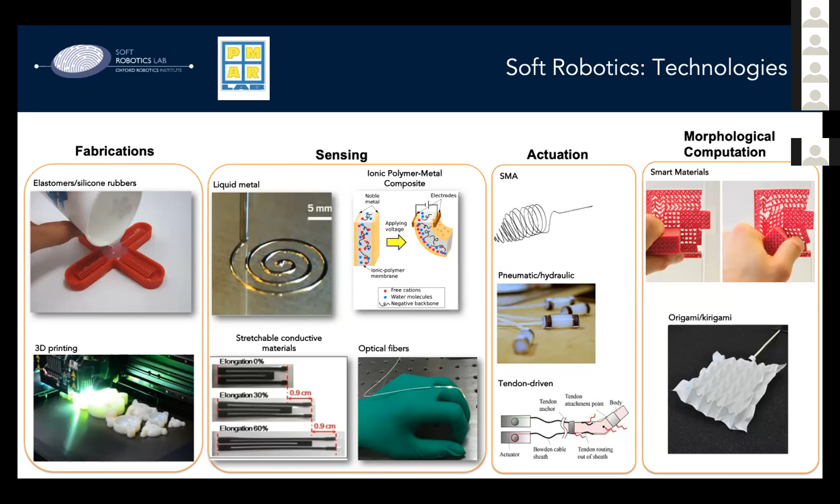And we need also to face new challenges related to the control of these systems, because we need to find new ways to model the behavior, because they are compliant, so they can deform in theoretically infinite ways. And for this reason, to precisely control them, we need to equip them with new sensing technologies.

Also, we can exploit their adaptability, but on the other side, we need to implement mechanisms to change their stiffness. And since they are made of soft compliant material, we need to find a new way to guarantee their durability, for example looking at new materials that allow self-healing. And finally, we are also interested in new methods for computing on board the robot instead of relying on rigid electronics.

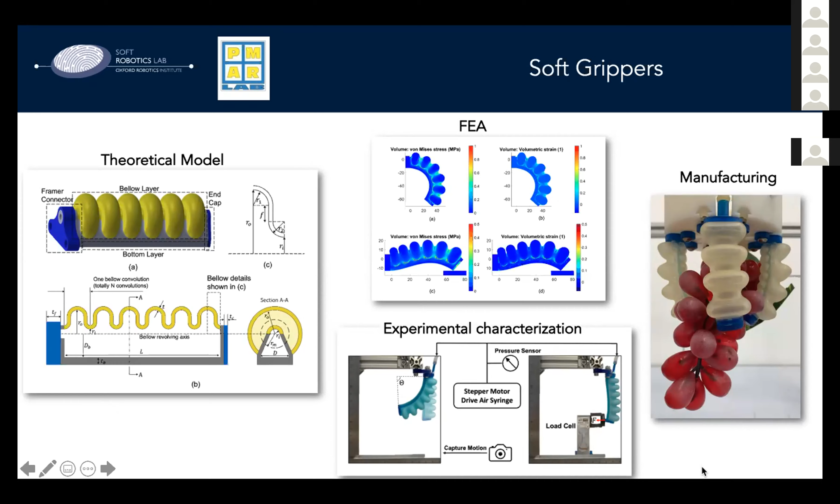So my research started to look at exploiting this kind of soft robot for grippers. In particular, we started to look at modeling soft pneumatic actuators. This is a bellow actuator, and we are looking at theoretical models to achieve the required bending and force of these systems. We perform finite element simulation and also experimental characterization to get systems that can grasp and manipulate soft objects, as you can see here.

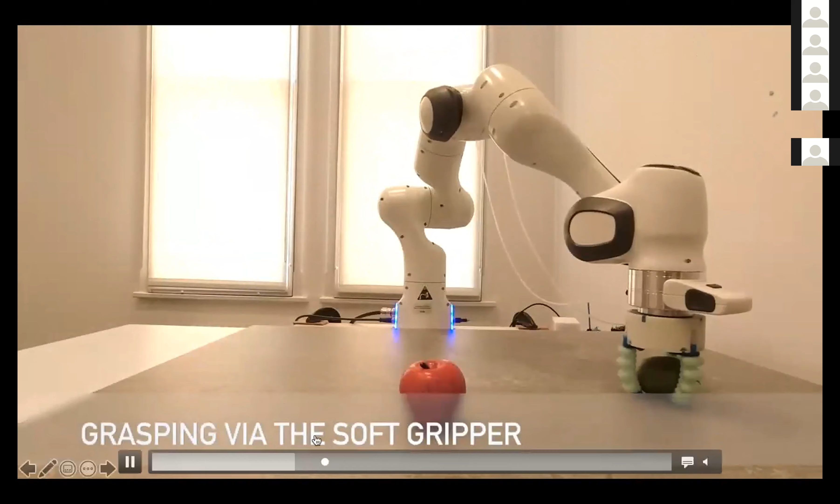These systems are mainly used in the context, for example, of agri-food robotics for harvesting and manipulation of produce, and they can show very high adaptability to different kinds of objects. So this is the first step that we started with these soft systems, but because modeling the kinematics of the system is very difficult, we mainly rely on piecewise constant curvature approximation or variable curvature approximation.

We are also interested in ways to model the system kinematically in a more precise way, but at the same time exploit some compliance. And so we started to look at origami structures. Origami are usually made by folding a piece of paper, but we started to look at thick panel origami, and moving from paper folding to systems that are 3D printed, you can replace the spherical linkages in the zero-thickness origami with spatial linkages in the thick panel one.

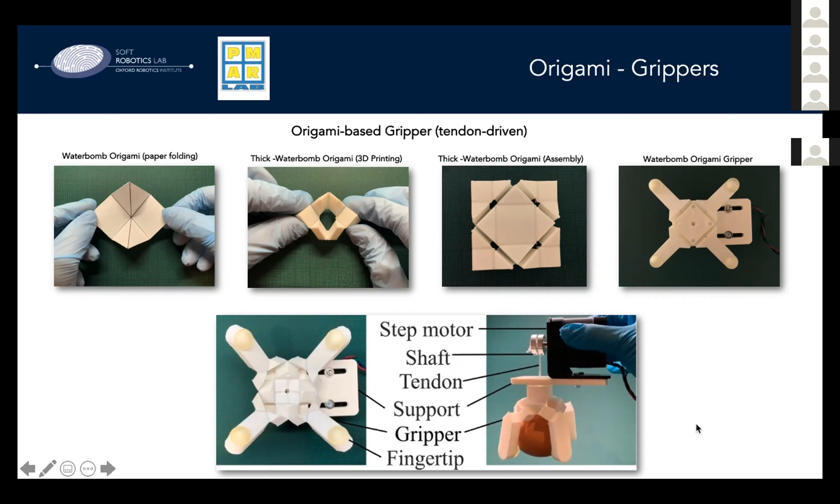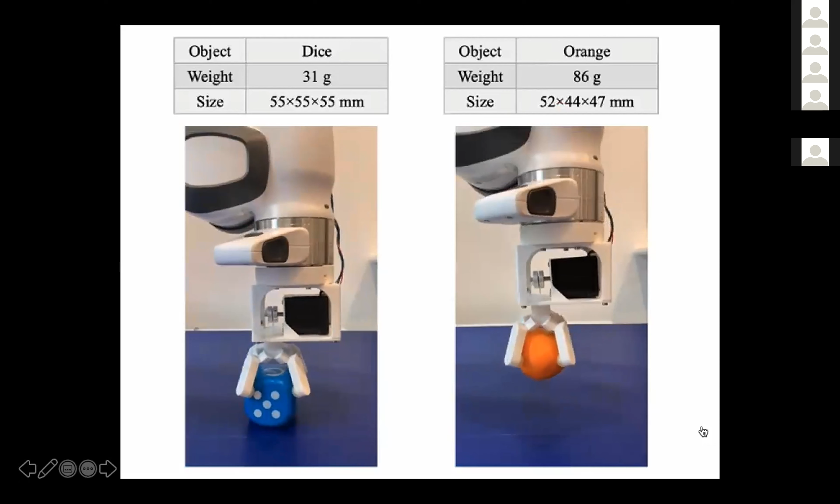Here we design a gripper that can be 3D printed in one batch, made by the assembly of waterbomb thick panel origami, four elements of waterbomb panel origami. Thanks to that, we can achieve a gripper with just one degree of freedom that can be actuated, printed in one batch, and actuated using tendons. We can kinematically model it very precisely, but we can also exploit the flexibility of the hinges to adapt to objects with different shapes.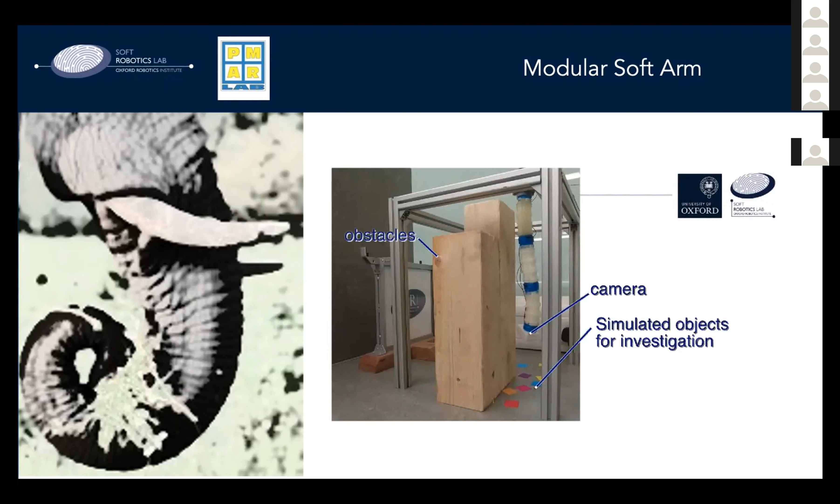We are also working, at the moment, on a modular soft arm, taking inspiration from the elephant trunk. Looking at systems that can be 3D printed, we moved from the usual silicone casting manufacturing towards a 3D printing system, to have something more reliable and repeatable, and to simplify manufacturing. Here we are building a modular robot that shows greater flexibility, as you can see in the video, and can cope with difficult environments, since you can control it to reach places that would be difficult for a rigid robot.

Furthermore, as I said before, we were looking at integrating soft sensing into this system, because we need to provide both exteroceptive and proprioceptive capability. We started to look at the design and modeling of soft tactile sensing.

This is a soft pressure sensor, made by a chamber, and it is also actuated, so we can control the pressure inside the chamber. This gives us the capability to tune the sensing performance and its static range, depending on the kind of forces we're interested in measuring. We can make this soft sensor stiffer or more compliant, and so change its measurement range.

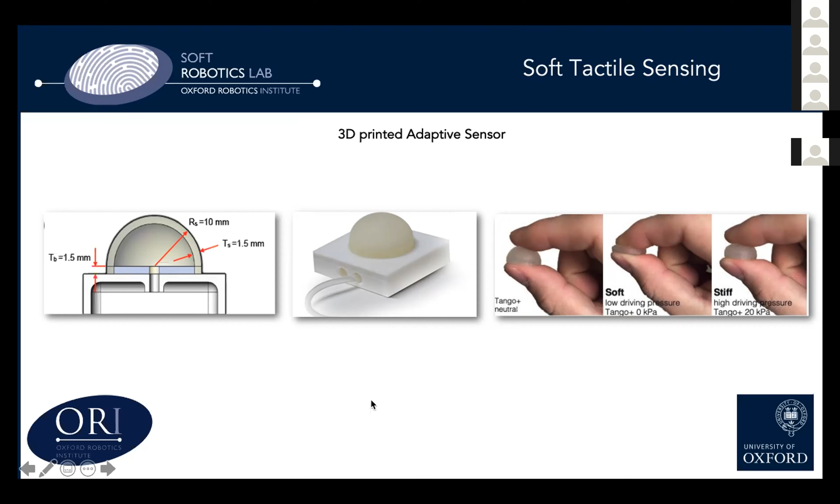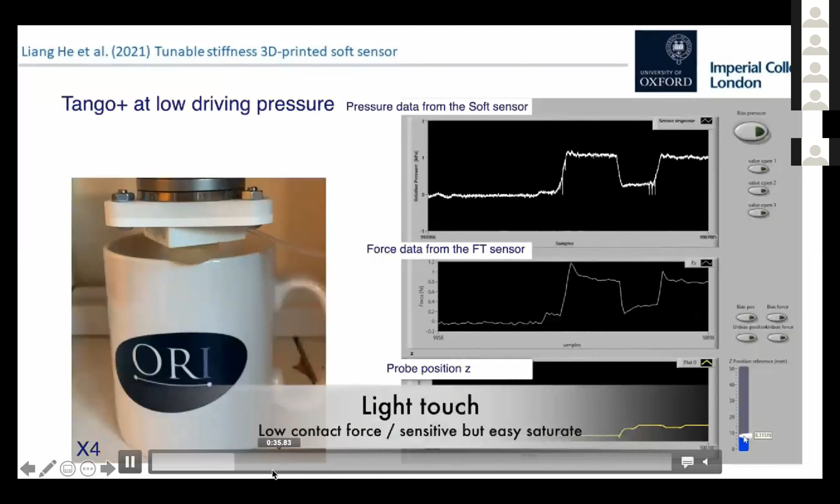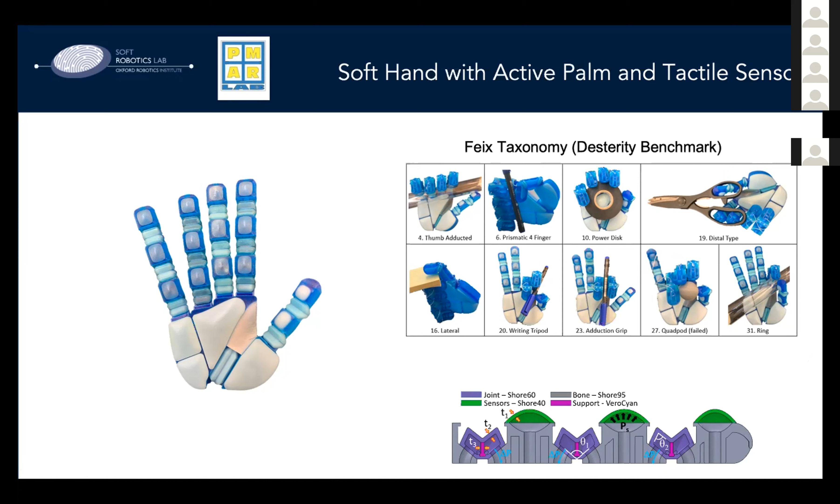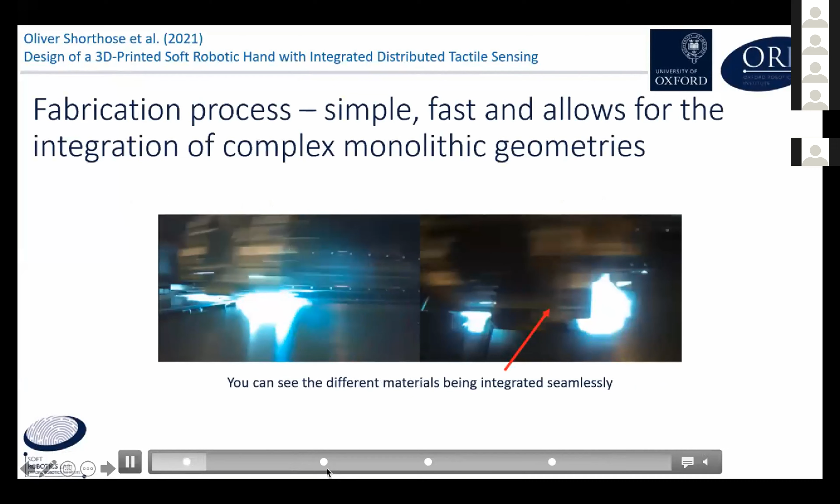We also looked at benchmarks such as the grasp taxonomy, to check that we could reach different types of postures and manipulate different types of objects. We performed experimental characterization of the hand from the point of view of range of motion and the force it could withstand. This is a system that is completely 3D printed, and as you can see in this slide, it is able to grasp and adapt to different objects very easily. This is the response of the sensor when the hand is in contact.

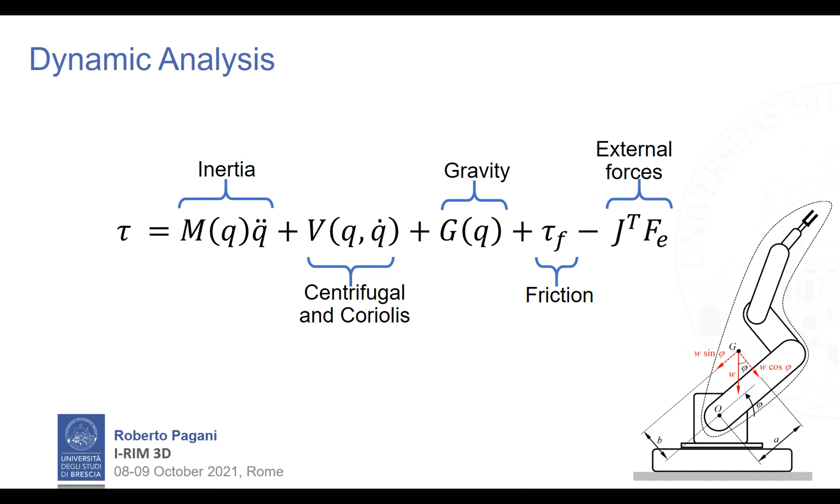The dynamic model is based on the well-known equation shown in this slide, where the torque applied to the robot joints can be calculated knowing the inertial matrix, the matrix containing the centrifugal and Coriolis terms, the gravitational term, the friction effect, and the contribution of external forces if there are any.

After this finding, we decided to study the robot dynamic model considering the thermal effect. To analyze the behavior of the robot during heating, we developed a ROS Industrial driver to allow complete automation of the process of sending trajectories and data collection.

A well-designed test trajectory has to excite the influence of all the model's parameters, and to identify the dependency of friction on temperature, the test has to be repeated over time, alternated with a special high-speed trajectory to warm up the joint.

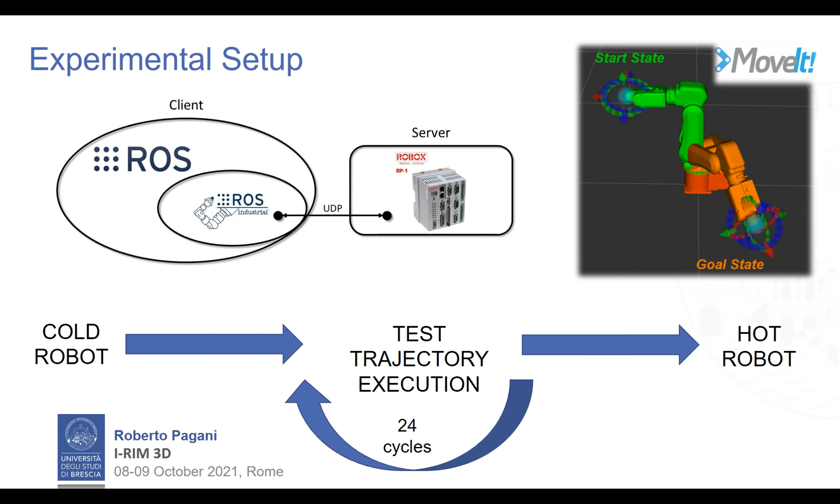The procedure starts from the cold robot. The test trajectory is performed, the robot starts to warm up, and the data is collected. This procedure is then repeated until the robot reaches its warm state.

To better identify friction and inertial parameters, the trajectories are divided into three stages. The first is optimized for inertial parameter estimation only, the second is specially designed for friction estimation, and the third is the warming trajectory to warm up the robot.

It should be noted that the friction identification is performed on only one joint at a time to simplify its analysis. The merge of all trajectory sections—inertial, friction, and warming—generates one cycle, which has a duration of more or less 5 minutes.

To acquire enough data for the analysis of the model, we performed 24 cycles, which correspond to about 2 hours of experiment. The temperature of the gearbox is not available in most industrial robots, and this could be a problem, but...

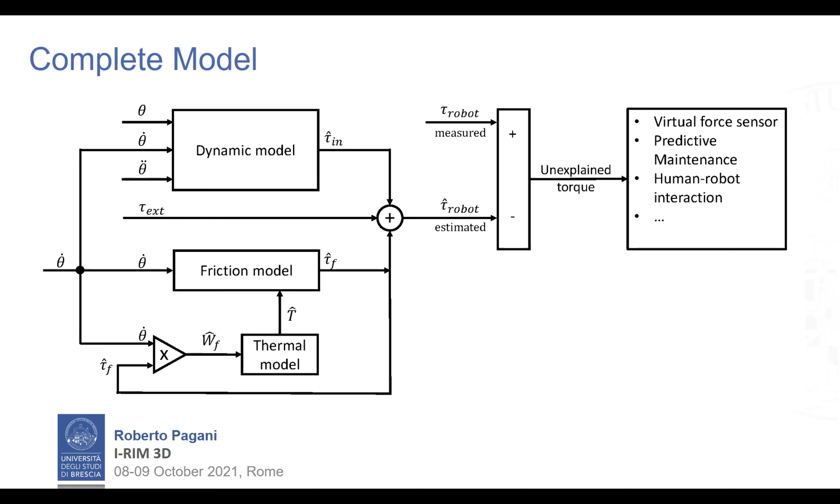For the experiment, two robots of the same model, Efort ER3A, were used, and we named them Robot 1 and Robot 2. The data acquisition was repeated 4 times for each robot on different days.

To have comparable environment conditions, all tests were executed in the morning after at least 8 hours of robot rest, and with the same environment temperature of about 20 degrees. Both robots showed very similar behavior; the curves exhibit similar trends, and the range of the curve values were also equivalent, confirming the repetitiveness and robustness of the method.

Inertial parameters should be independent of temperature, and the numerical estimation would be expected to give a constant value. The results show instead that they also have an asymptotic behavior; however, the range of variation is generally minimal.

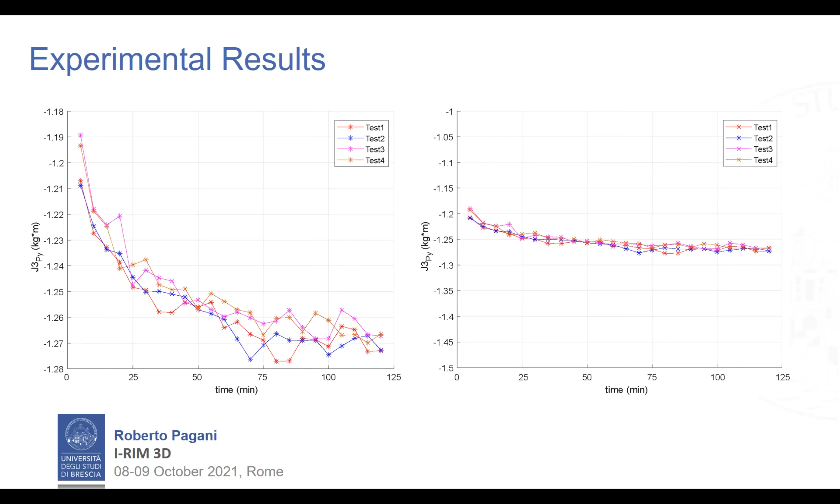Example of the result for the inertial parameter estimation, shown in this figure, clearly demonstrates that the estimated value of the parameter changes with cycles, but the variation is very little. This confirms that the identification procedure is robust and suggests that the inertial parameter estimation can be performed after a short warming up period to avoid mathematical error.

So thank you very much for your attention. And if you have any questions.